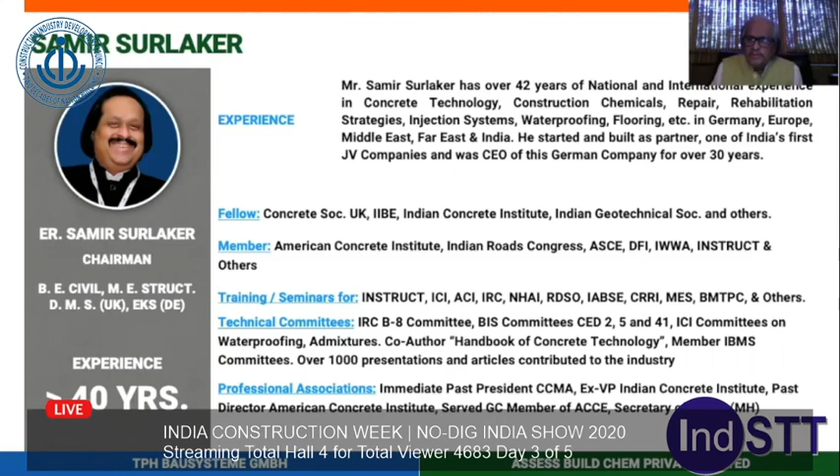Basically, I am a civil and structural engineer by profession. I have spent about 40 years in this line of construction chemicals in India, Europe, and at other places, and this is my line of specialization. I feel construction chemicals is a good field in which many new engineers can include themselves and even become entrepreneurs because the entry barriers are very low.

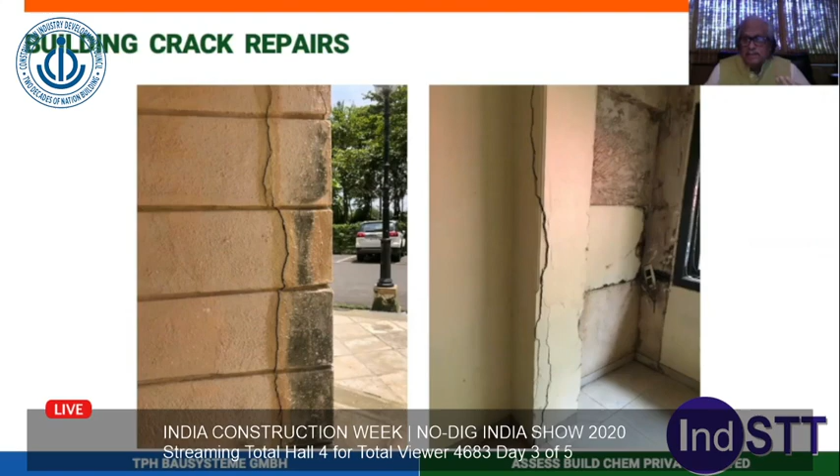As far as underground leakages are concerned, they are unstoppable during construction as well as after construction. We are talking about the concrete. In concrete, we'll always find cracks and capillaries. These cracks are the avenues for carrying the corrosion causing constituents to concrete, so they have to be sealed from the point of structural as well as durability.

These are the photos after repairs. Though we conduct repairs to enhance the durability, still in reality, the mortars that we are using are not shrinkage free. So they create these lines once again, which are the avenues for entry of corrosion ingredients, and while repairing, they will not stop the process of corrosion.

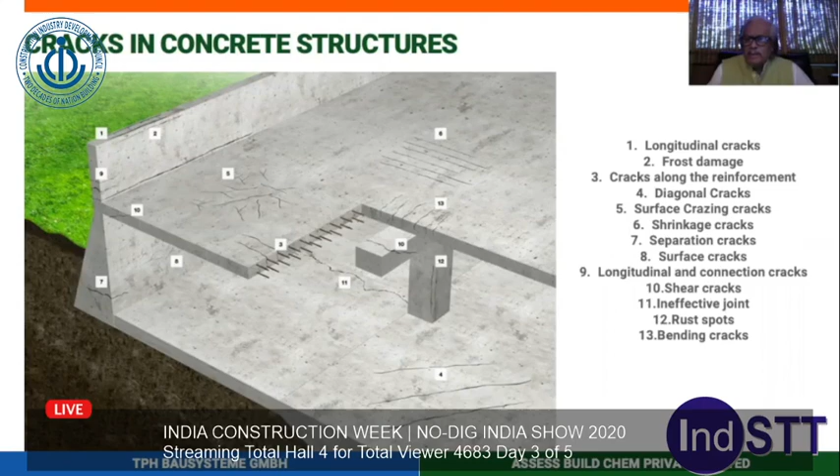There are cavities in concrete, which is also important to be filled. It's a different type of cracks in concrete, as you are aware. There are longitudinal cracks, cracks by different damages by mechanical means, and surface cracks. At the end of the day, we have to take care of all these cracks.

Also, I would like to say that it is not adequate to stop the cracks and put the injection material inside the concrete alone, because the source of water is behind the concrete, and that is the soil concrete interaction. We have to also take steps to stop that leakage, or to stop that source of water to a reasonable extent, so that we can keep that source of water far away from the concrete.

Injection technology gives you a chance to go behind the structures, into the soils, and put a stoppage to the water permanently as well as temporarily during the construction and permanently during the life of the structures. Third important point is the joints.

Joints are provided by design, as well as joints are there by virtue of construction problems. These joints become avenues from where water can leak. However we have taken all the precautions, it bypasses the systems, and these joints are open, and water also comes from the joints. So the injection technology also provides for resealing of these joints.

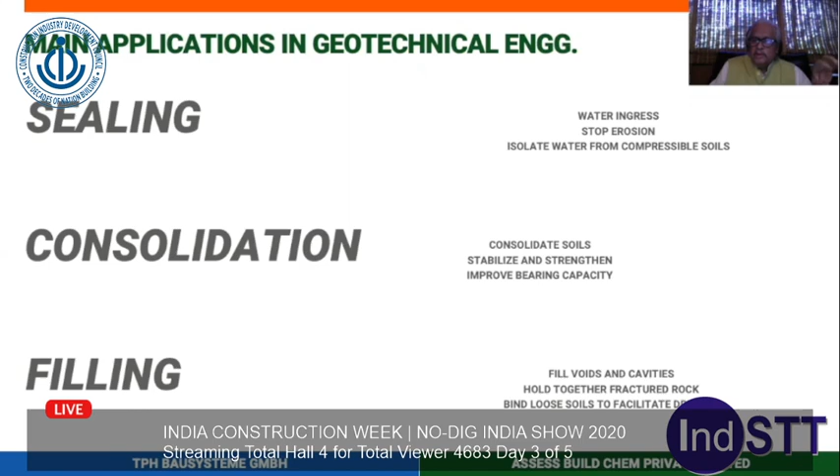The main applications in the geotechnical engineering of the injections are in sealing, consolidation, and filling. So this technology comes handy during construction and after construction.

Fortunately, there is a code EN 1504 which fully covers this whole gamut of repairs and rehabilitation, and also covers the materials for injections.

Before 10 or 15 years, whenever someone said about injections, we always thought it is an epoxy injection. We used to use epoxy injections a lot at that time to structurally regain the strength of the concrete wherever there are structural cracks. But epoxy has its limitations when it comes into contact with water, so this limitation is also filled by several other materials available.

At the moment, whenever you start talking to people about injection, the first thing they say is, oh, you mean PU, you mean PU foams. Please note, PU and PU foams is just the beginning of injections. These are purely temporary methods to stop the water, to enable you to seal the crack permanently. So this is not the end of it.

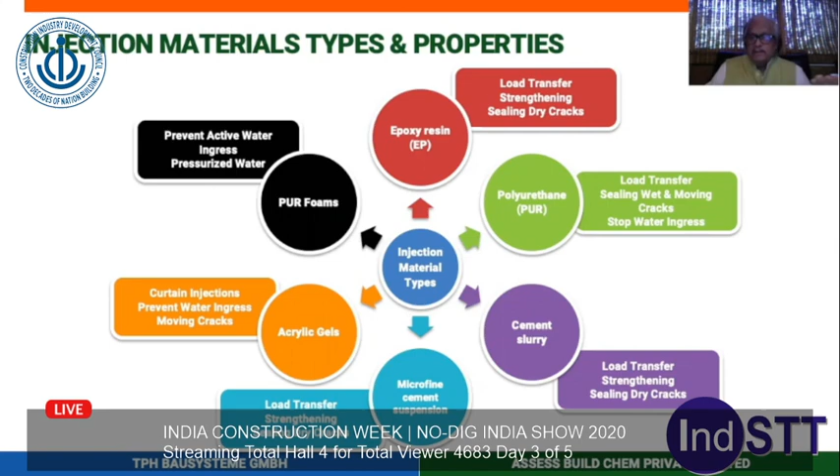There are different materials available, and these are to be classified. A good geologist and a good civil engineer, with the help of existing codes of practice, has to make a decision whether in cracks you require a ductile filling, or you require force transmitting.

Force transmitting means where there are structural cracks, where you used to use only epoxies. Due to the limitations of epoxies in conditions where there is water in the concrete, today there are structural polyurethanes which can be injected, which are more flexible compared to epoxies. This can also be used for repairing the girders of bridges where there is vibrational load.

And finally, for the swelling or just for the filling, you can also use foamed materials, which are either gels, silicate foams, or polyurethane foams.

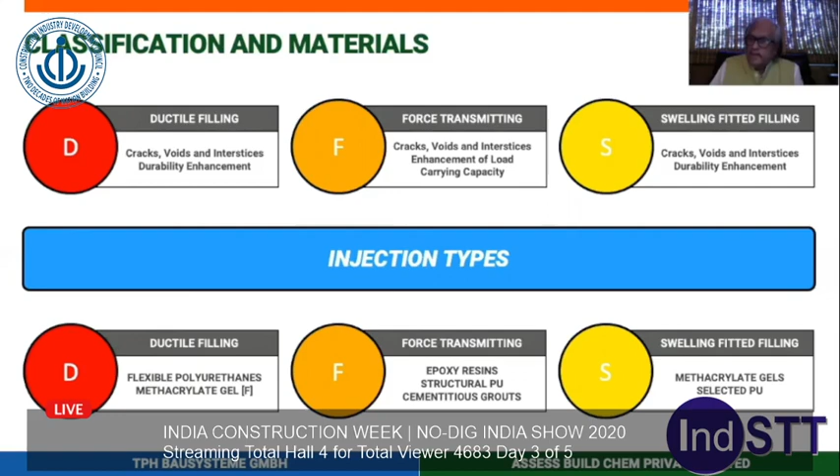So a large gamut of materials are available, but these are to be selected depending upon very few important things, which is the crack width, because crack width will determine the viscosity. Crack depth will also determine the viscosity, how deep you want the material to penetrate.

It will totally depend upon whether the crack is dry, damp, or whether water is coming out of it. If water is coming out of the crack, you have to stop that incoming water by putting pressure with your machines, to push back that water and let the injection resin reach the place where it is designed to reach.

The crack movements, whether the cracks are moving or not moving. What is our target solution? Are we doing the injections for structural stability, for load transfer, or only for preserving the durability, for sealing? The applicability, the locations, the applications, whether we can take big machineries inside the project - there are several different parameters connected to this.

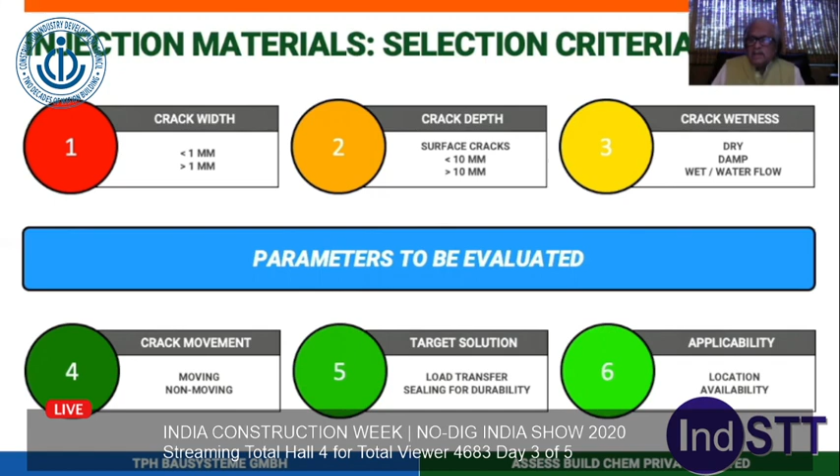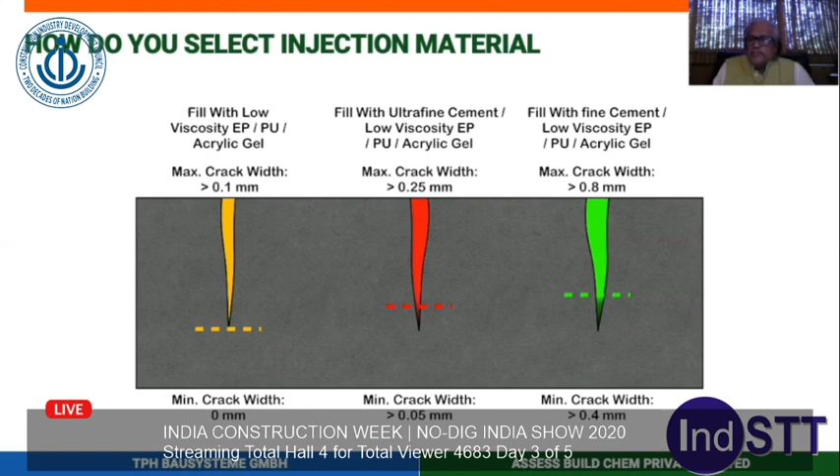So this is a technology by itself. This is not only a technology of materials, it is also a technology which involves the machineries. Only by combination of good materials, good application technology, and trained applicators, can one do successful injections.

This is just to give you an idea. Viscosity, as I said, is very important. Water is having a viscosity of 1, and water can penetrate - water is what has already penetrated. So we have to have materials very close to water penetration so that we can counteract with the effect.

If we take gels, they are very close to water. They can penetrate and their viscosity is less than 10 mPa·s. When you talk about epoxy resins, you are having a very wide range - so every epoxy resin is not for injection. From 17 to 100,000, this is very important.

Silicate resins are also excellent, from 90 to 330. So viscosity plays a very important role. The urethane resins, the polyurethane resins, have much lower viscosities in some cases so that you can really inject them inside deep cracks. You can use it as a filling, cavity filling injections.

Just to give you an idea, honey is 10,000. Normally you cannot inject a material when it crosses 500 or reaches 700 viscosity. The other thing which is important, what offers resistance to it, is mostly the concrete.

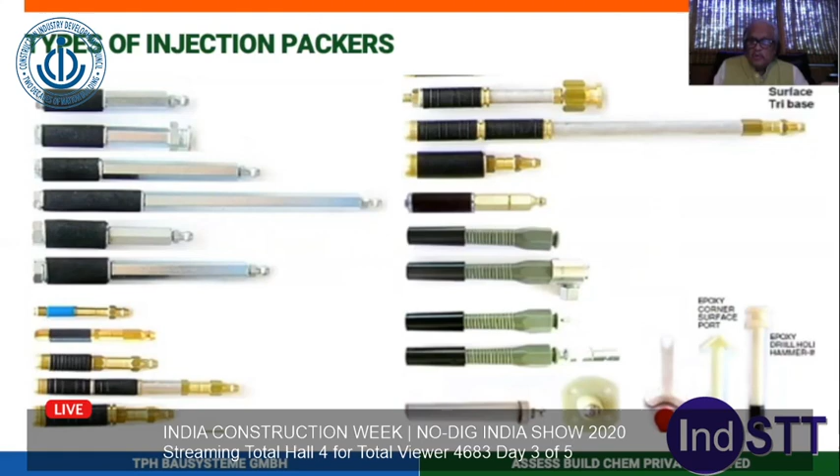What is most important about the connection is that the pressure you put through machineries is not lost due to bad connections. You also require sophisticated machineries which are properly designed.

For example, when you have a very small pot life injection which has to react within say a minute or less, even a few seconds like 10 seconds, then you need 2-component machineries. You cannot put both materials in one component machinery, so you necessarily require two component machineries.

Now these 2-component machineries - when you use polyurethanes, they are sensitive to moisture. So these machineries should be designed so that no moisture is penetrating. Polyurethane is not just the foams alone.

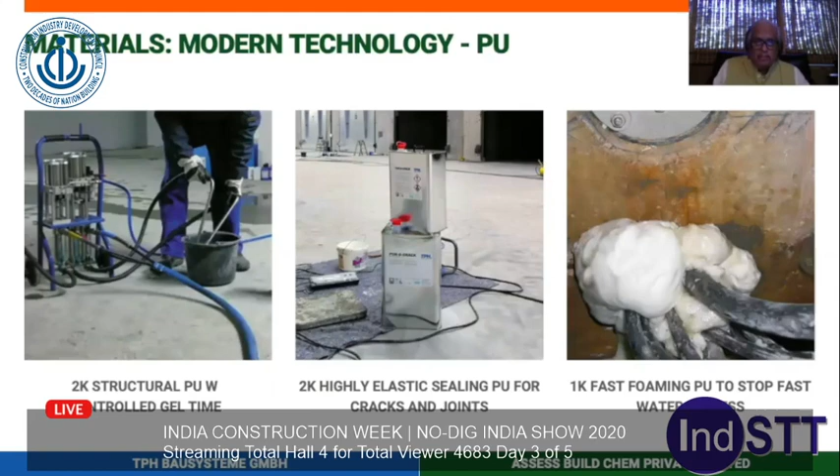Polyurethane foam is the basic thing, like 1-component foams which are used for very low pressure injection. So this is how it forms - the moment the material comes into contact with water, if you put a 1-component foam, it starts foaming.

This can foam - now this is a very important thing I'm saying. This can foam from 5% or from 3% up to 75%. So when you are purchasing the foams, it is very important to know what is its expandability.

The unit price is not per kilo price or per liter price of the foaming material, but it is the cavity that you are going to fill. It is also important whether the foam is hydrophilic, hydrophobic, whether it has open cells or closed cells, whether it is homogeneous, and in how much time it starts foaming. This will all depend on the type of project that you have.

So this is a basic foam, which is a 1-component foam. 1-component foam is suitable only for temporary stopping of material where the heads are not high, because its reactivity with water cannot be controlled. If the water is cold, it doesn't expand. You cannot control its setting times, and it has limited applications.

In structures like tunnels, the water will be gushing. With this type of water gushing, which is more than 6 bars, if you start injecting this with cement or cementitious materials or even one component foams, the pressure of the water coming is 6 bars pressure. You will not be able to stop it with one component foam, even temporarily. Let us not talk about permanent stopping, but even temporarily.

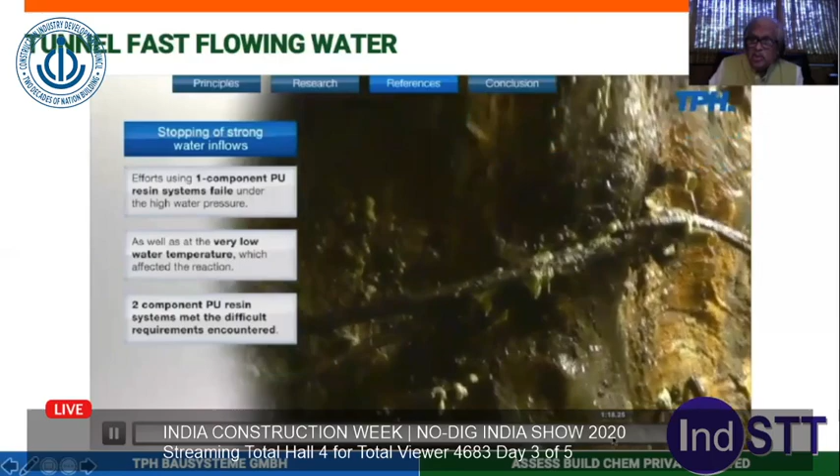So primarily, you will have to go in for two component injections, because two component injections have controlled reactions. They are a little bit harder compared to one component. The foaming capacity is less, maybe up to 14 or 15. So they can really stop this water when you use proper machinery to push these materials inside. This is how from one component material you move to a two component material.

Then there are flexible materials, ductile filling materials. When you are talking about pushing these materials into cracks, in concrete, in podiums, and in other structures where flexibility is required, polyurethanes are very, very flexible. You can inject them, and they are not sensitive to moisture.

In cases like this, which you normally see in basements, underground, and parkings, you can see the water coming inside. This is the method of injection. You have to drill the holes at a 45 degree angle, put mechanical packers inside, and fix those packers so that the material reaches the center of the crack. Then start injecting the material with proper machinery and proper connections.

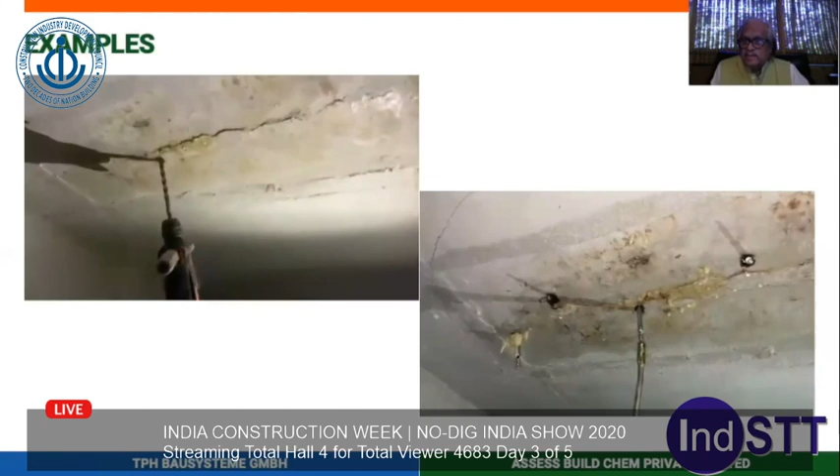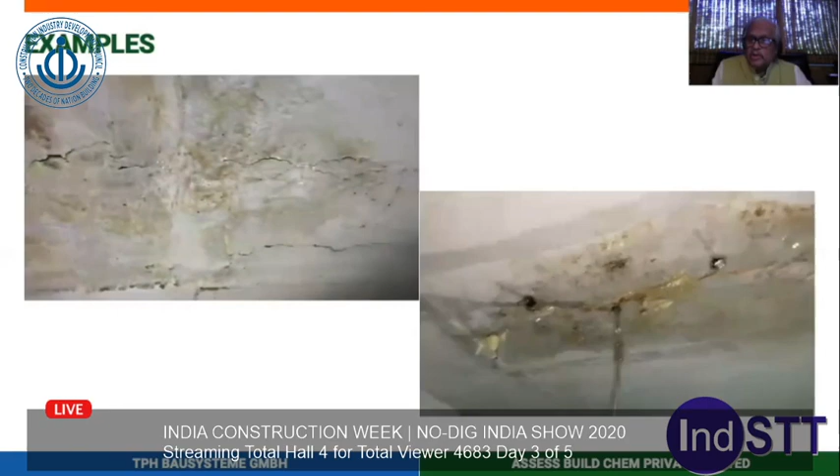Here you can use the ductile filling material. These are two component polyurethanes, but they have limited structural capacity. Their aim is to seal these cracks, not to increase the strength of the concrete - this is not a force transmitting injection. But these are also important for injections in podiums and parking places.

And then comes the most important - two component structural polyurethanes. Structural polyurethanes develop a strength of 70 to 80 Newton per mm square. So you can replace epoxy injections with them, even in cases of dry cracks, so that you don't have to mix too many materials. They can be used underwater. There is no problem of hardening, and they are not sensitive to moisture.

Their foaming can be controlled from 1 to 15. They have very high bond strength, very high shear strength, and this is very important for either soil consolidation or force transmitting cracks. And these are the materials. So polyurethanes alone, foaming polyurethanes, is not the end of the story - it is just the beginning of the story.

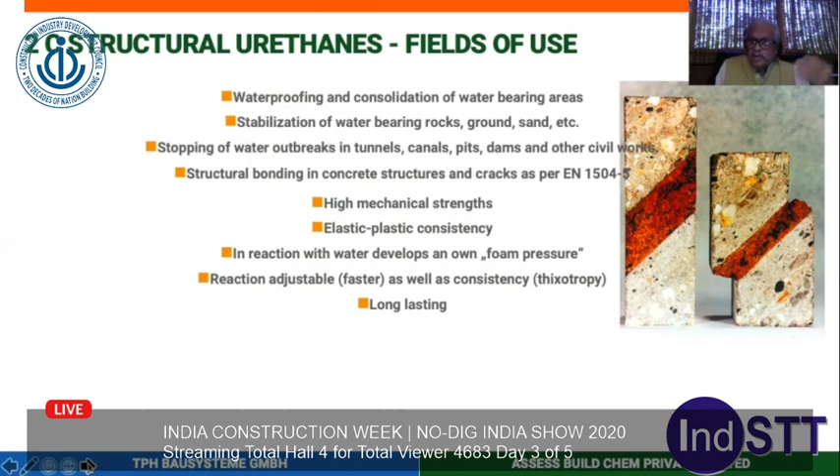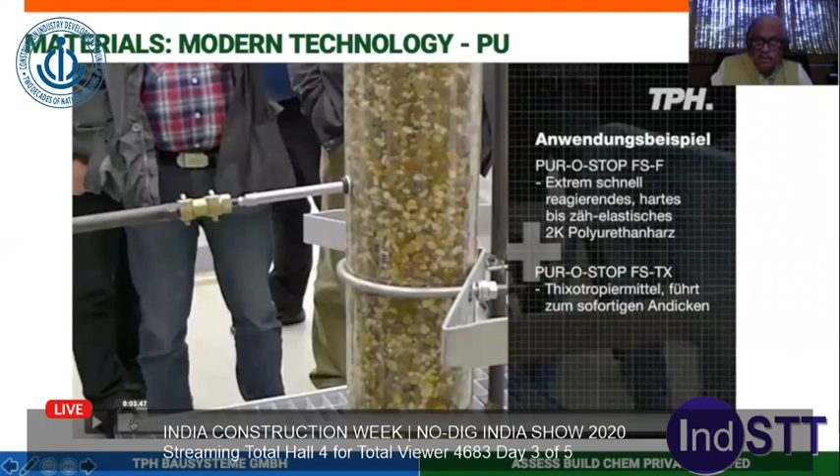So even if you do the temporary stoppage of water by one component foams, for permanent stoppage of water you will have to go for two component structural injections. This is just demonstrating how it works, because this structural injection can be used in existing structures, as well as coming handy when you are building things like tunnels.

In tunnels, where your geological examination has already shown that maybe 70 meters ahead you already have a fractured rock from where water is coming, you cannot stop your TBMs from going. So this comes very handy.

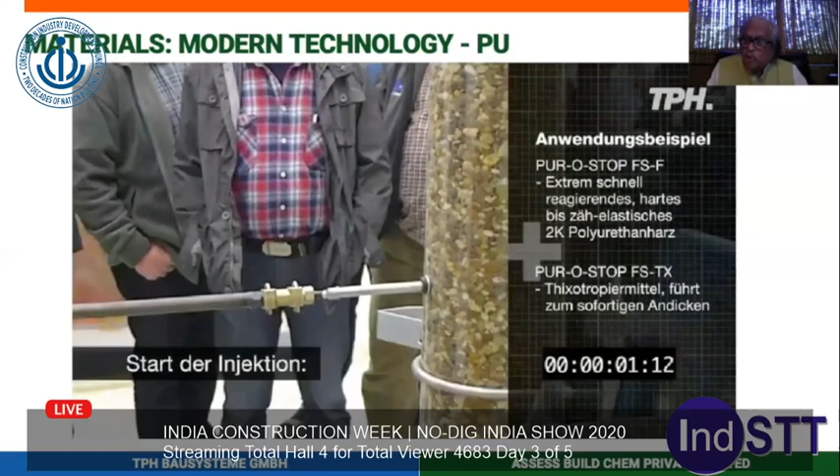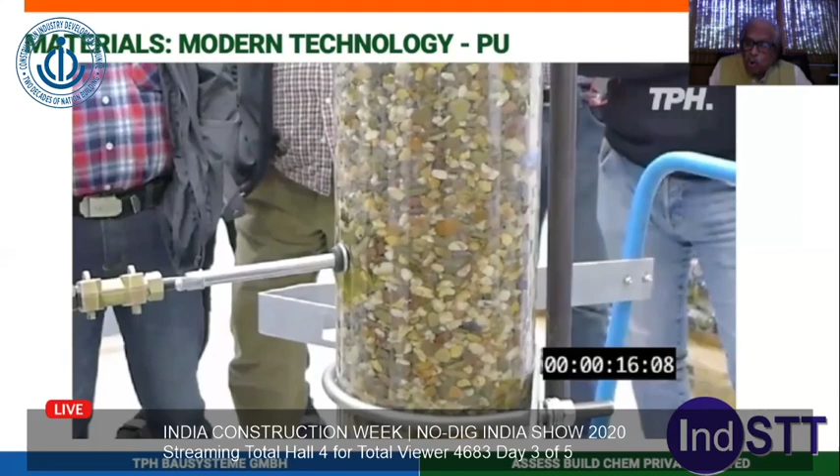So you start injecting a structural polyurethane. It's only 7 seconds - first, the speed of reaction is very important. In 7 seconds, in fractured rock, you're putting the material in. In about 17 to 20, or 20 to 30 seconds, that much time is required so that the material can spread all around, because you cannot just make it set within 1 or 2 seconds - the material has to also spread all around.

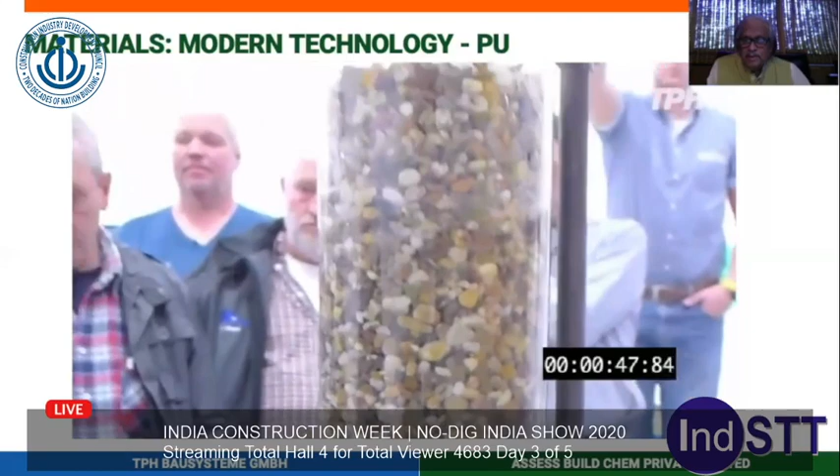Then it has got a foaming capacity. When it comes into contact with water, its reaction starts within about 30 to 40 seconds. The reaction has slowly started, and it is a structural, permanent solution.

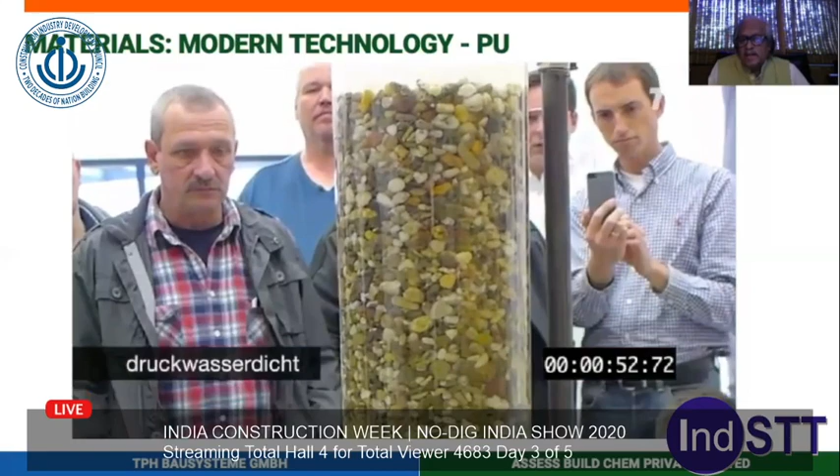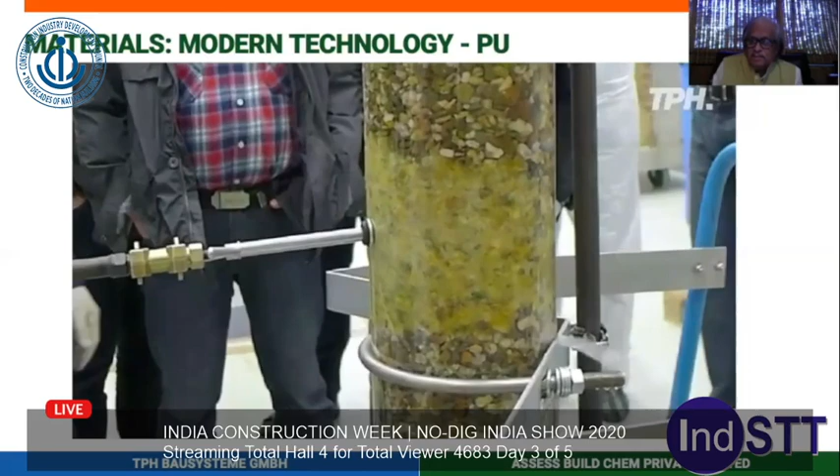If you see now, the water has stopped going inside and the water is rising. From the bottom, the stream of water is getting reduced. It has expanded, not very much, but to a reasonable extent so it is spread all around. The water from the top is flowing out. The water which is coming out with gushes is now slowly stopping, and within about 1 minute, the total process is over.

This can similarly be used in our basements. We have a lot of problems in our basements. The water comes inside and you cannot stop it with foam. If you stop it with foam, tomorrow, once again, the foam is thrown out because the foam is not durable.

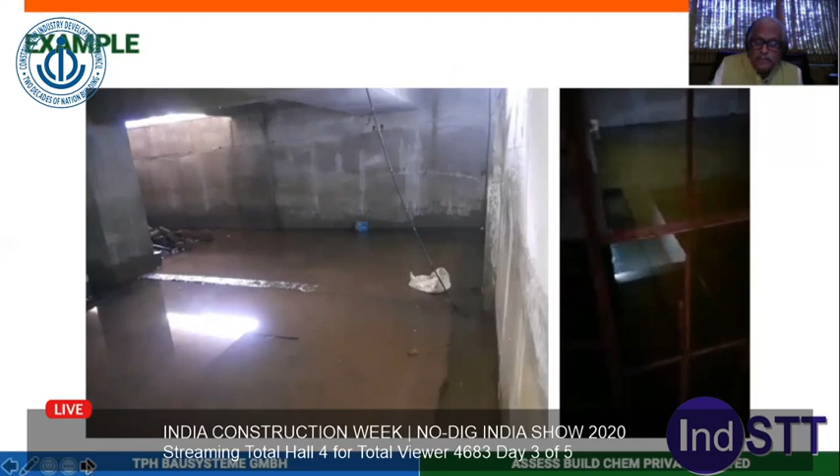These materials are tested for durability of 100 years. There are long-term field tests of about 20 years, and by extrapolating, these materials are very suitable and remain almost permanently, which is very important. Foam is not stable, foam does not have the capacity to bond to concrete, and foam does not have the water pressure bearing capacity. So these different polyurethanes are very handy when you try to stop water during construction.

For example, this is the type of water. You can try to put any foam inside which expands 50 times or 40 times, but it cannot stop the water. Because to stop this type of water coming under a pressure of 6 bars or 10 bars, you really need polyurethanes which are structural, which can harden totally underwater within a period of 1 to 2 minutes.

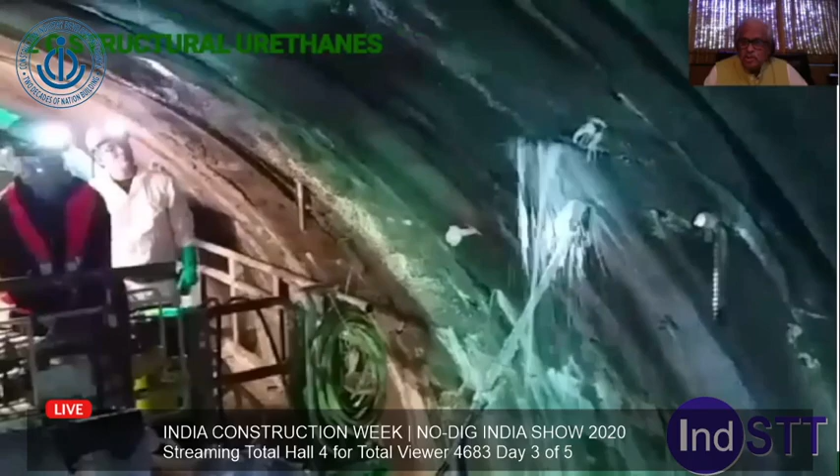So your construction can go on unabated, and it forms a permanent seal—a permanent solution. You see the water is going on reducing in a matter of just minutes. So this is the real live stopping of water. Within about 1 or 2 minutes, the flow of water is reduced, and these are the only means of providing a permanent solution during construction as well as after construction.

Still more versatile resins are the two-component silicate resins. Polyurethane is not the end of the story—there are also silicate resins, these organo-mineral silicate resins. There are foaming silicate resins and non-foaming silicate resins. Silicate resins bond very well under wet conditions.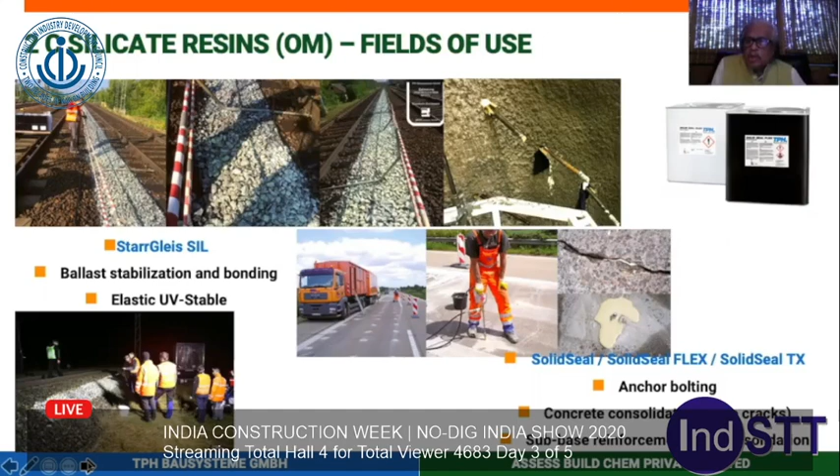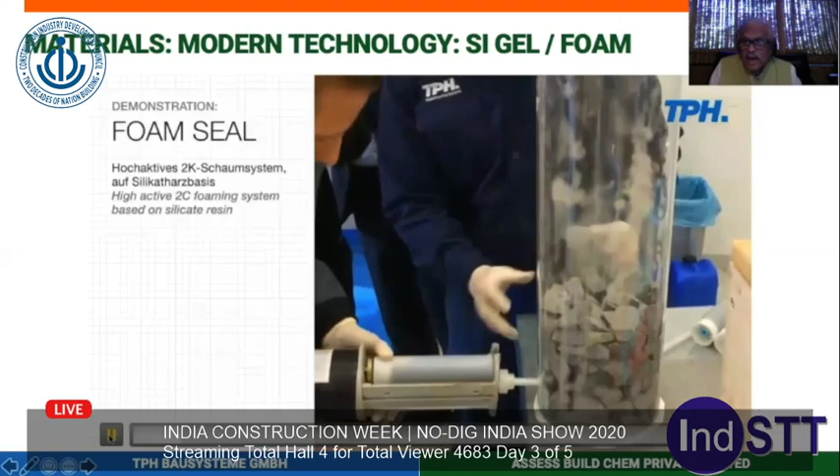Silicate resins also foam structurally, say at a ratio of 1:3, and they can be used for the lifting of structures. They go very nicely inside the soil and do the stabilization. They are structural and can also be used for the same purpose as polyurethane injections. If there is a fractured rock with no water, or a fractured rock with water where you need polyurethanes—because polyurethanes form only in the presence of water—whereas silicates form on their own and can glue. They can glue this fractured rock, especially during construction.

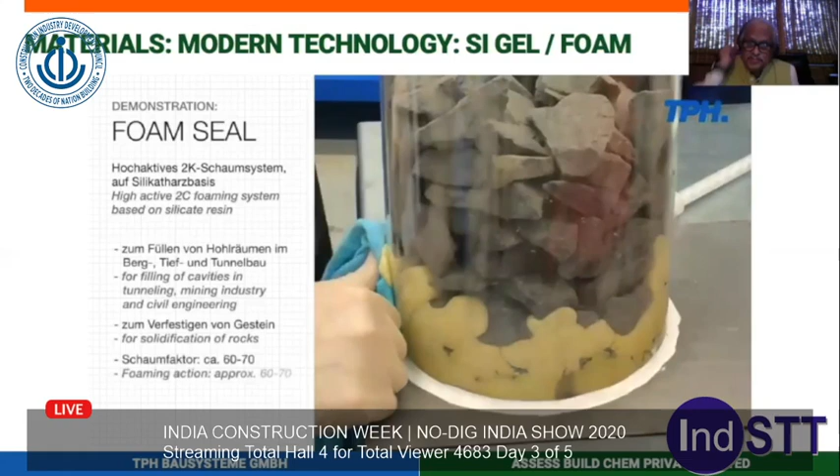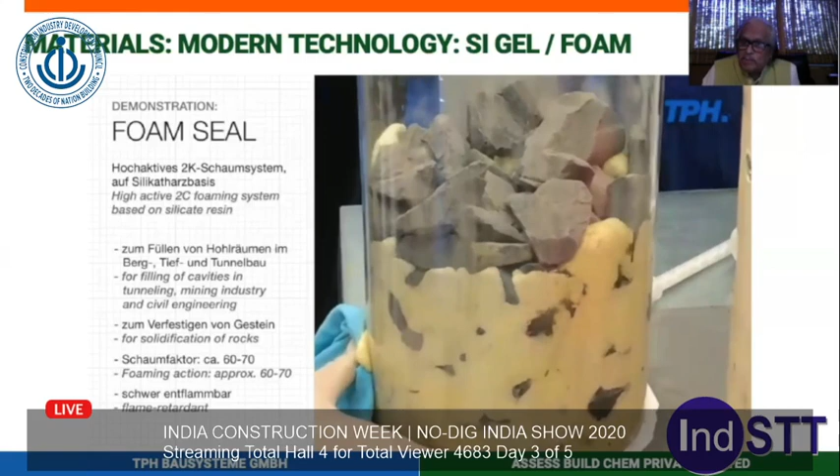You see here, this is now already injected. This foam with restrained expansion also develops sufficient structural strength, so when the machine passes through, it offers enough resistance. You can see the very fast foaming.

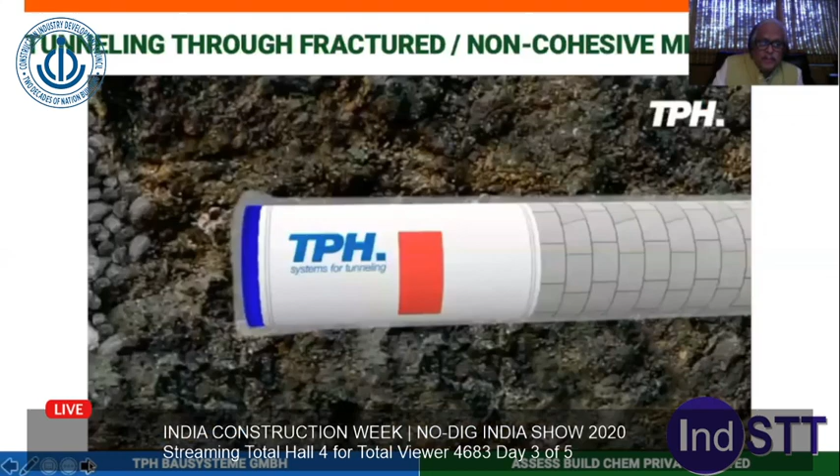Even if there are some remnants of water, it will throw it away. These are mostly used on TBM machines, and this would be a good example to show a tunnel boring machine. When the tunnel boring machine is moving around, geotechnical surveys have already identified that at X meters you are having an issue, so you are already putting in the silicate foam—it cannot move, the shield cannot move.

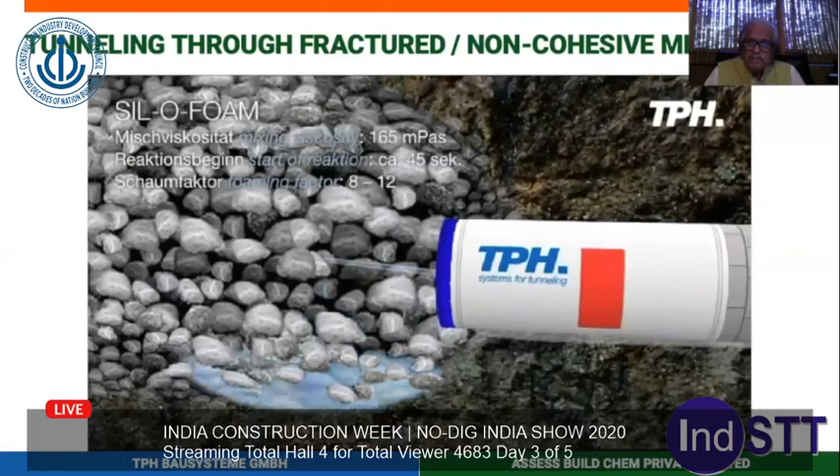So the silicate foam is injected. This foam is not expanding 60 or 70 times—within 45 seconds, they have maintained the foaming factor at 8 to 12.

One thing you have to remember: you'll see some certificates that claim a foaming ratio of 1 to 15 with a compressive strength of 15 Newton. This is not possible, because the tests for foaming factor are done with only a 1:1 or 1:3 ratio. So you can't have both things—as the foaming increases, the compressive strength decreases.

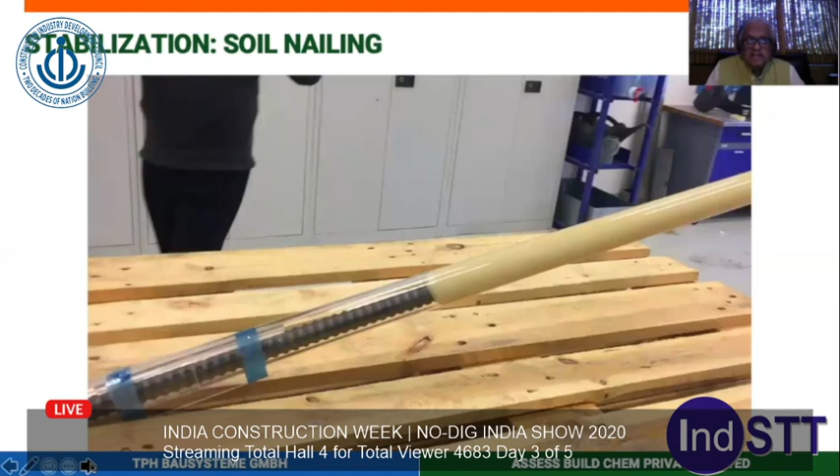Now these foams are also excellent for soil nailing. Inside, you have soil nailing, say about 15 or 20 meters, with self-drilling anchors. It's a very versatile material. It doesn't expand—in this particular case, it is non-expanding.

It will slightly expand so that it creates a bond. If there is water inside the structure, you cannot use epoxies for fixing your anchor bars, whether it is self-drilling anchors for soil stabilization, or even transfer of loads in RCC repairs to be done to foundations below the water. There you have to go in for silicate technology.

You shall be seeing now how many materials and how many parameters a geotechnical engineer has to consider before just writing specifications, which I see in many dam specifications. He said repairs are to be done by 2-component polyurethanes. This does not say anything. The performance criteria should be given.

What strength you require for repairs, what viscosity is required, in how much time. For example, this develops a pull-out load up to 20 tons within about 10 minutes. Within about 10 minutes your reaction is over, it is developing the full strength. These are the resins you have to consider as new generation resins.

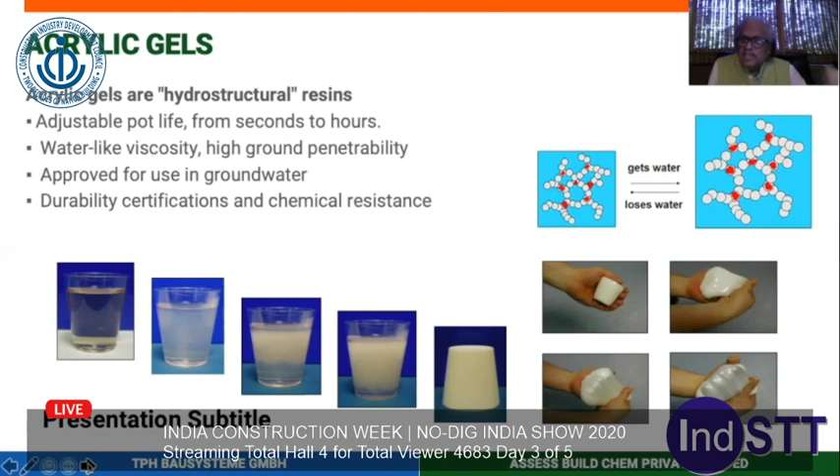Please note, every gel is not a gel. Some gels, they will just become gels, but after some time they will shrink. Once they shrink, the joint becomes very vulnerable to water entry. So they react very fast.

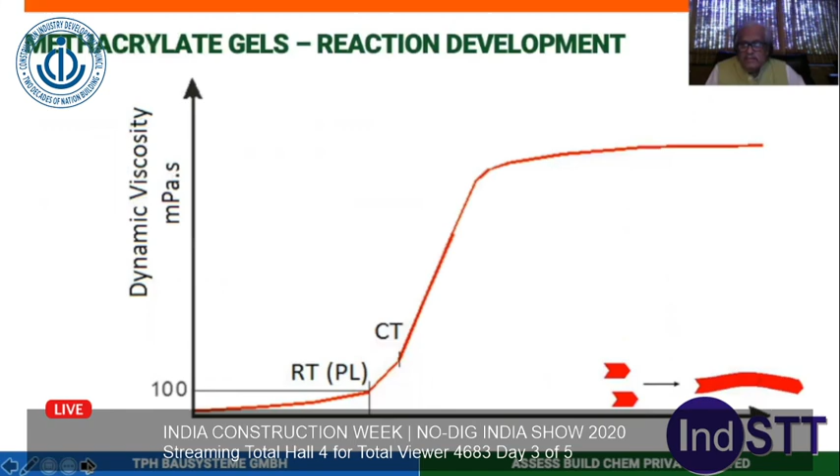You can see within, when it reaches say a viscosity of 100 mPa.s, it is still pumpable. Then the reaction time, in about 10 to 12 seconds, you can control it. Then it starts increasing in the gelation time, and it is gelled. Within about 20 minutes, it is a proper gel. I will show you one or two videos to show you the type of gels.

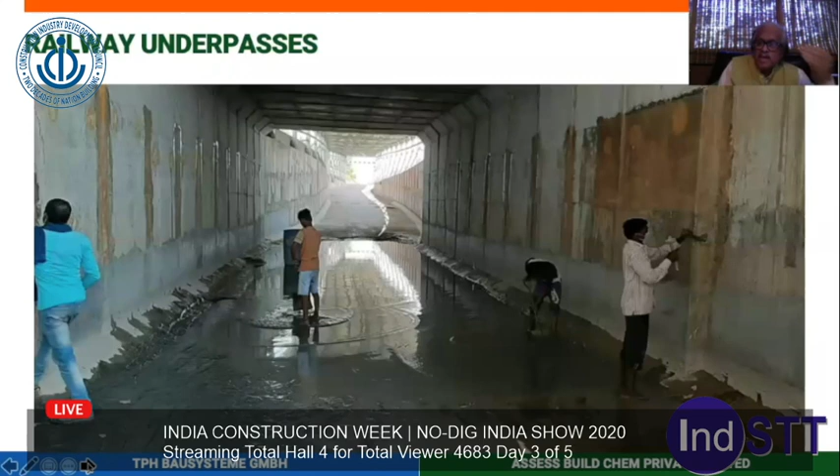These gels are normal, and can also be fortified with acrylics to give a characteristic so flexible that you can convert it into a joint filling material. There are so many projects coming to us of this type, like railway underpasses. These underpasses are normally made out of precast elements having a depth of about 4 meters, a length of about 4 meters, and a depth of about 60 centimeters. They are placed side by side.

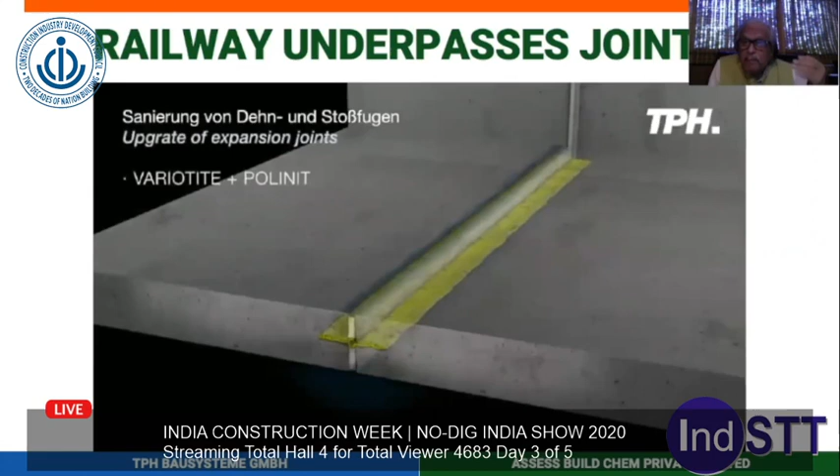Sometimes the joints are filled by some boards, sometimes with other materials, but they fail and water starts coming inside the roads. The roads become unusable, and the gels are the only solution. Please note my words - I'm saying the only permanent solution. Initially you can put some foam inside to stop the water if it is coming in very big quantities.

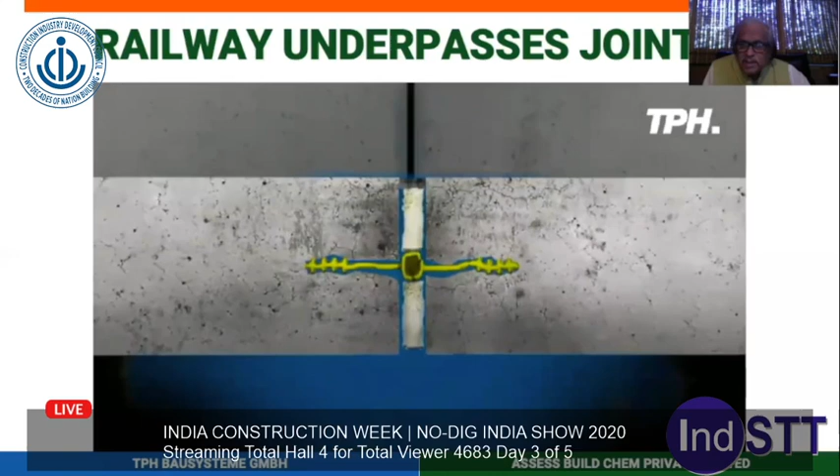But if you see these joints, sometimes water stops are provided in the two connecting elements. Sometimes we put styropor inside, sometimes you pull Styrodur or dimple boards inside. But by some chance these are breached, the water still passes, and the joints become very vulnerable.

There are suggestions from people saying you use only foam, no problem, it is stopped. Of course it will be stopped for 2 months or 4 months or 6 months, because foam is not a permanent material. Some people say put other polyurethanes inside, rigid or flexible. No, this won't help either, because you have to create a joint sealing material.

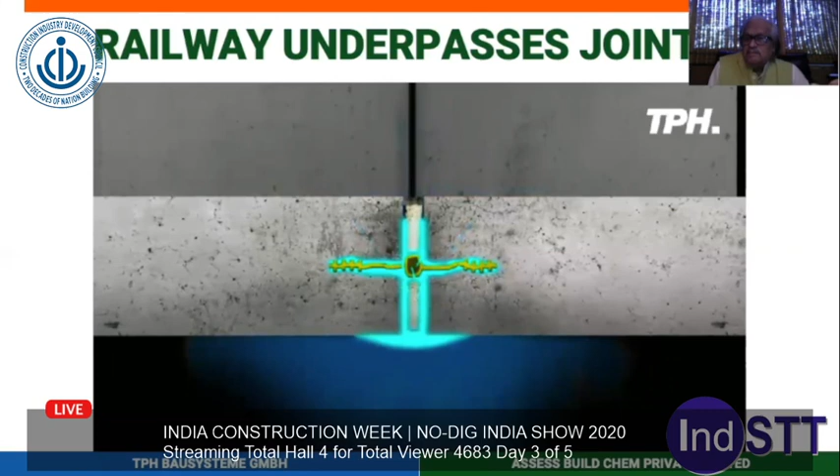A joint sealing material should have adequate bonding on the sides. It should have enough elasticity for expansion and contraction, and it should become a seal - joint sealing and joints, because this is very, very important. So any other method won't work.

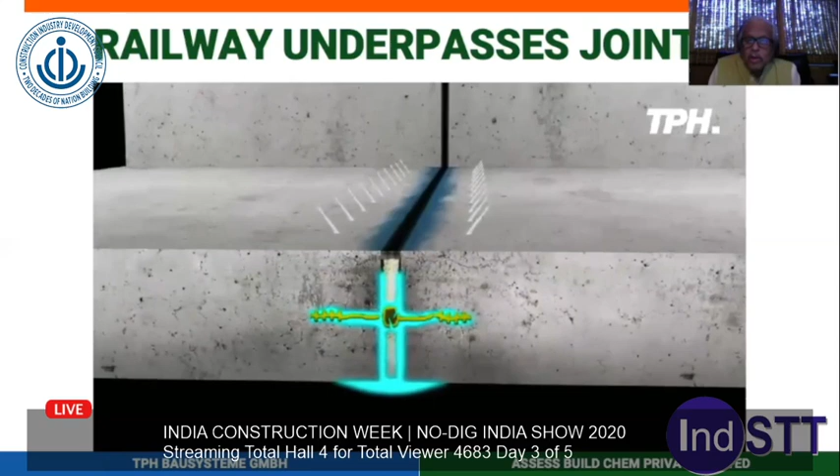Over a period of time, when you use the gels, you inject - you can see it is such a simple process, a single step process. You could make this simple one-step process into a 4-step or 5-step process by putting other injections or foams inside. Okay, you can still put some foam inside to stop the water initially, but permanently what is important is a gel.

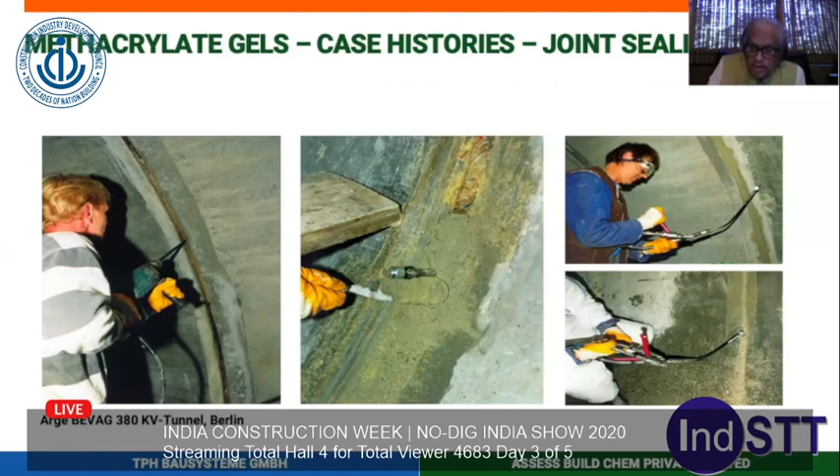Which will set inside. This material is also very, very important in precast joints. In precast joints of the segments, you already have gaskets put inside. However, due to constructional problems, these gaskets are not 100% waterproof, and water starts coming in through the gaskets. But please remember, at the end of the day they are joints - you can inject through the joints by needle injections.

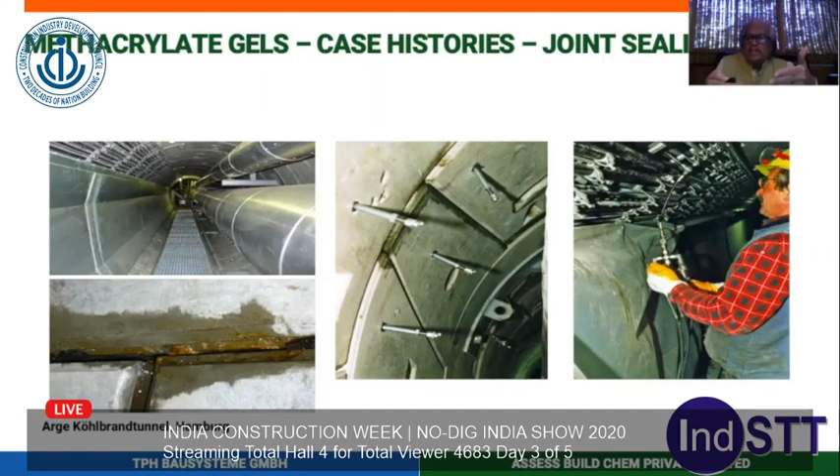Also, you can inject it from two different sides. You don't have to puncture. Sometimes you can directly puncture the gaskets and go behind it if water entry is less. If water entry is more, you can do it through the packers, which are put at 45 degrees. They go behind your gaskets and create the same thing. The same technique—you are going behind that physical barrier.

Some physical barrier should be put. If they have not put a physical barrier, and if your width is 60 centimeters, you can put some Styrodur board up to say 30 centimeters. So automatically you get a physical barrier. Go behind that 30 centimeters at a 45 degree angle and inject a gel inside it. A little bit of gel will come because there is not a sealing with the thermocol, Styrodur board, or dimple boards—some material will go there. It is good for you.

If you want something more sophisticated, if this comes in the factory floorings, you also have a small portion kept above where you can fill a joint filler. You can seal that joint with polyurethane joint sealants or polysulfide joint sealants—many joint sealants or polymer joint sealants can be used. But this is the basic technique. There's no other technique, and this cannot be a temporary thing.

I wanted to show you, for your interest, the material—what material is going inside. It is not a rigid material like polyurethane, which I showed you, goes inside. This is just to show you the material that goes as a gel. This is a fortified gel, just a trial to show you. You see, this is the material, two components. We are simply pouring it to show you the type of material.

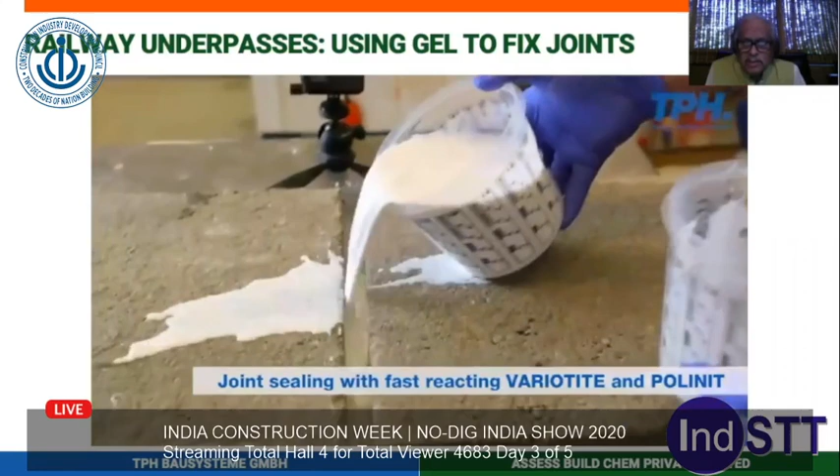It gels within no time. Finished—the material has already started gelling. It has already gelled. It is a 3-component gel: A component, B component, an accelerator, and a fortified polymer.

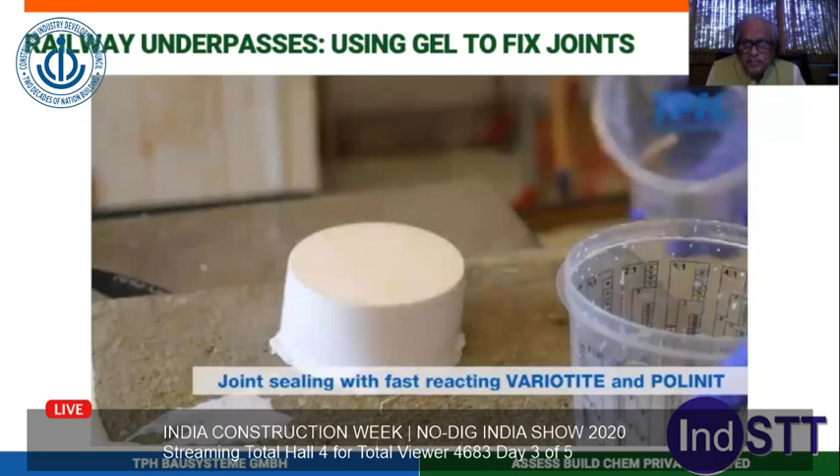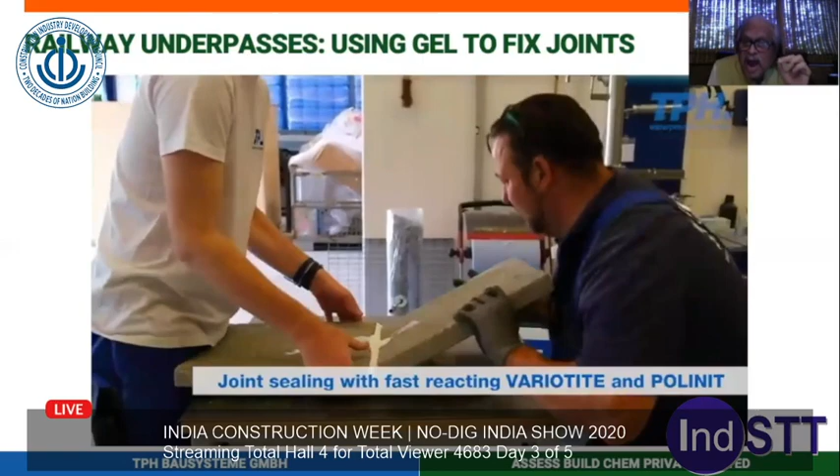You can see here, within seconds—within 10 to 15 seconds. And this is the material that goes inside the joints. If you put any other rigid polyurethane inside, or a flexible polyurethane inside, within 10 minutes it has developed adequate bonding strength, which is most important. Any material you use to recreate the joints in the segments, or to recreate the joints for the underpasses, or any other joint from where water comes—a joint is a joint. It is to be treated like a joint. The bonding should be there on the sides, and it should have enough elasticity.

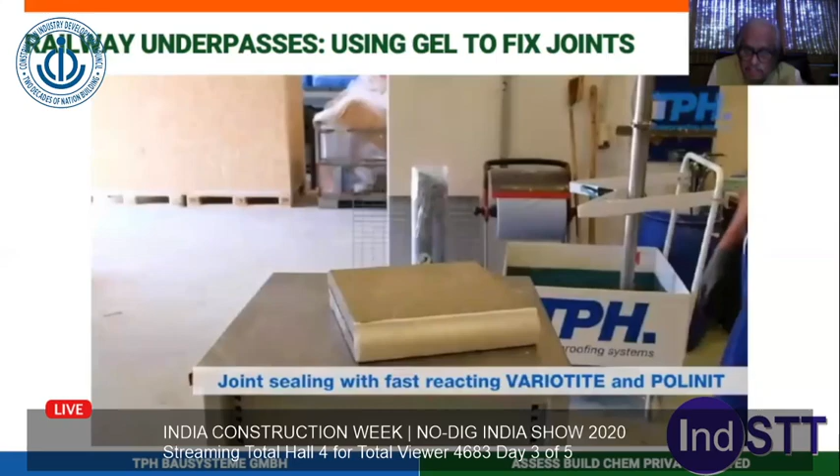You can see here, within 10 minutes, any water that comes reacts with it, and it is totally elastic. What is more important is that this material is tested with proper certifications, with proper certificates, for a period of 20 years in the field. There are official test certificates available for this, because of the durability.

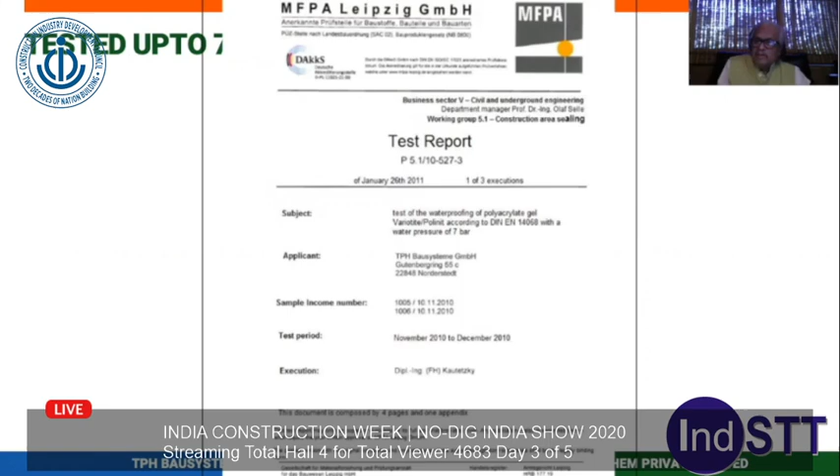Once you try to put something in a metro project, and the metro project is designed for 120 years, any material that you put behind should have that durability. Also, when these are tested, you can see it has been tested for 7 bars. That means if you take a one-component foam, even if the pressure is 2 bars, it will throw the foam out. If you take another 2-component foam, maybe at 4 bars, it throws out. These materials are essentially tested as per EN 14068 to 7 bars, but they remain live even up to 12 bars—that means 7 bars means 70 meters of head.

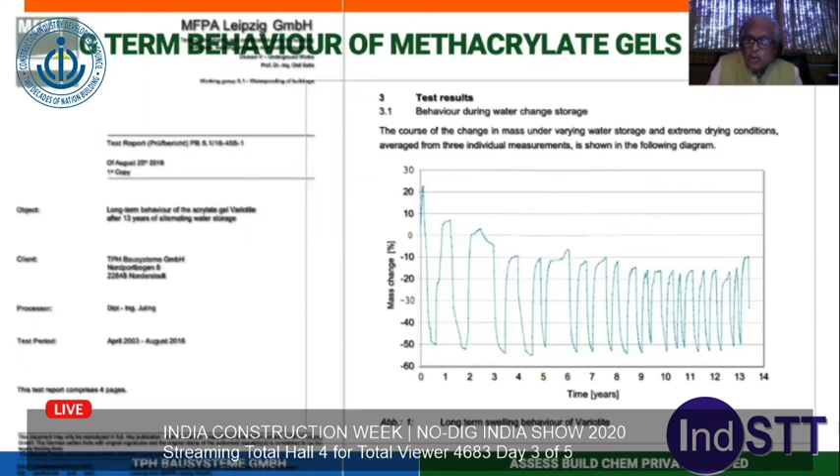For durability testing, these gels are liable to expand and contract inside when in contact with mud or with water. They can be tested—this has been tested up to 13 years in the field, showing how much it expands, because when there is less water it shrinks, and when there is more water it expands. If you see the cycles over a period of 13 years, this can be extrapolated, and the engineering estimation of durability of this gel is 120 years.

Compared to your PU foam—a PU foam doesn't bond to concrete. A PU foam cannot go inside the joint. It can't bond on the sides of the joint. A PU foam cannot be so flexible as what I said.

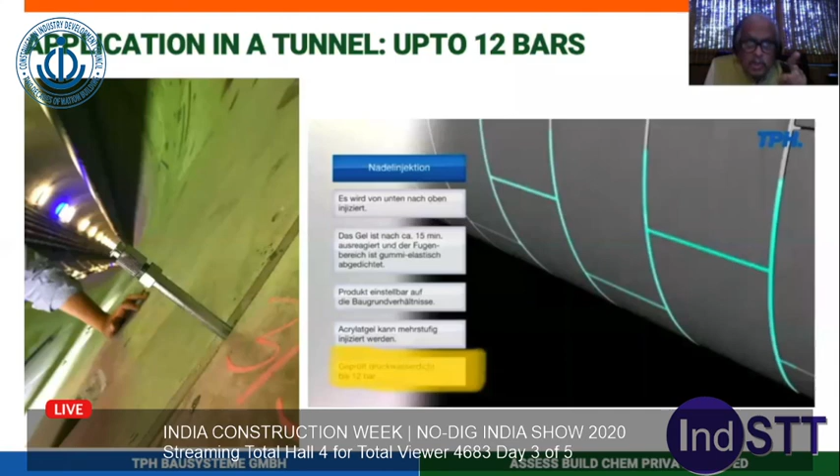PU foam cannot last for 120 years. So if you want a permanent solution, these are the permanent solutions available to you. And more than that, this has been tested for pressure and durability.

There's a no-dig show going on simultaneously, with micro tunneling. Even if there is a water pressure line with pressure of about 12 bars, and the joints are leaking because they're built segmentally, water can go inside, which is very dangerous, and drinking water can go outside.

There's only one way to stop it as of now: using acrylate gels. It is not one component polyurethane, not two component polyurethane, not one or two component flexible polyurethanes, not a two component structural polyurethane, because we need flexibility here. We need a good bond. It should remain under pressure, and we also need durability.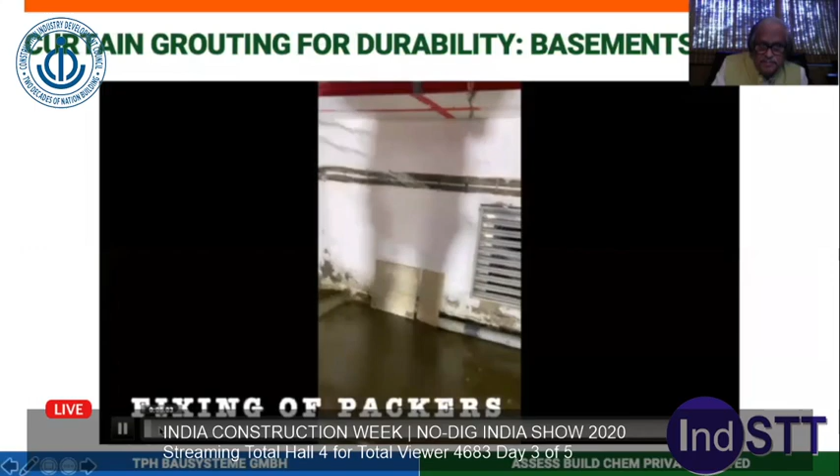So these are the solutions available now, on a simple example. If there's a basement, this is a basement done in Bombay. This is a 6-level basement in BKC, where the water was coming with this strength.

And we use the same technique. Since more water was coming in the beginning, we use the polyurethane foam, one component or two component, to stop more water coming inside. But that is a temporary solution. You need to use a foam, but a foam is a temporary solution, not a permanent one.

We used also some physical means. You put some rods inside, some lead inside, because the water has to be stopped for injection to work. Then we are injecting, with the knowledge of the structure, with expertise, with trained applicators.

This is 6 floors below, a 16 meter basement in Mumbai. And this can be stopped. The water can be stopped permanently. What is more important is a permanent stoppage of water, not temporary.

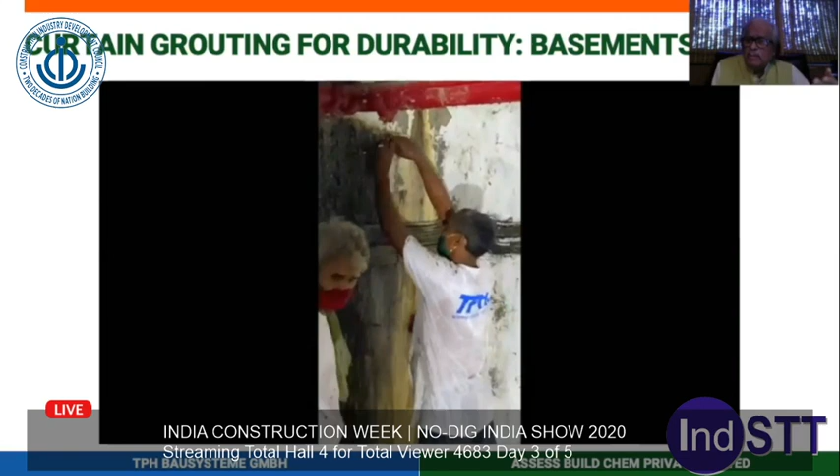They have done several trials for several years. So many people have come and injected so many things: cement, polyurethane, rigid polyurethane. So many things were done. But here, what we finally have to create is a sort of curtain walling behind the basement, which can withstand even 7 bars or 70 meters.

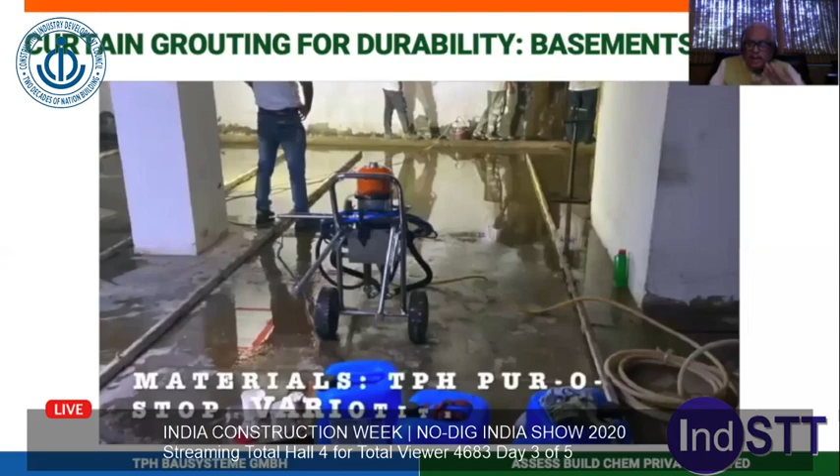So it forms a membrane. That was our trained applicator standing there with machinery, well trained. This machinery is from Italy, two component machinery. It is beginning for injection. You require expertise, you require expertise.

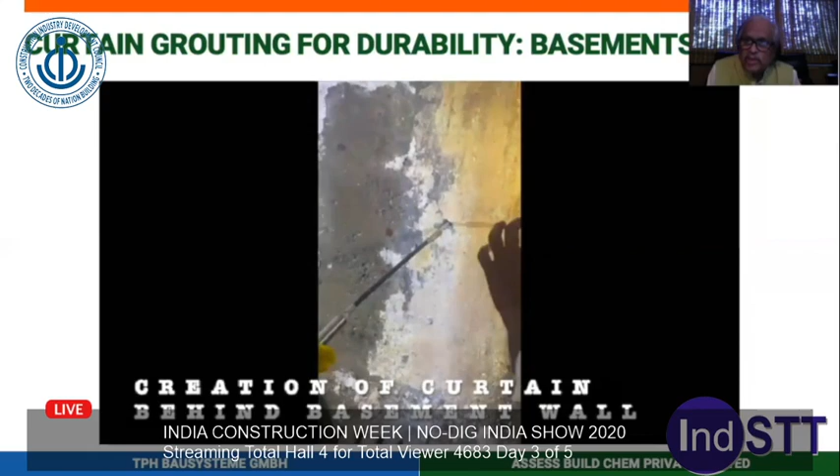We offer trainings. This is a beautiful opportunity for new engineers to go in for their internships, or become entrepreneurs. During this time, the jobs are less.

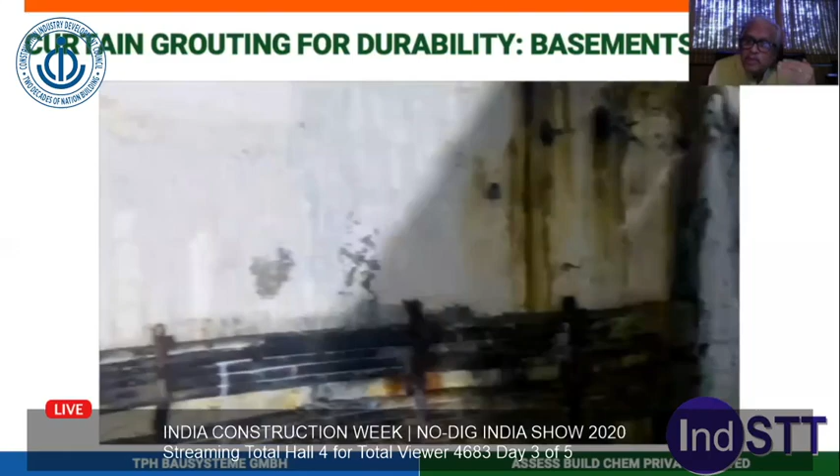We are injecting now behind the basement wall. We are not injecting in the concrete, we are injecting behind. So what we are doing is creating a positive waterproofing from a negative side. We are standing inside and creating a waterproofing layer outside. So our whole aim is not only stopping the cracks in the concrete from where the water is coming, but stopping the source of water. We are keeping that source of water away.

And as I already discussed, there's durability, a guaranteed durability. It is not poisonous for any water, and the water is completely stopped, and stopped permanently.

I request you, please use these technologies. Please use your engineering knowledge, your geotechnical knowledge, your civil engineering knowledge. Please use your common sense, civil engineering common sense, I would say.

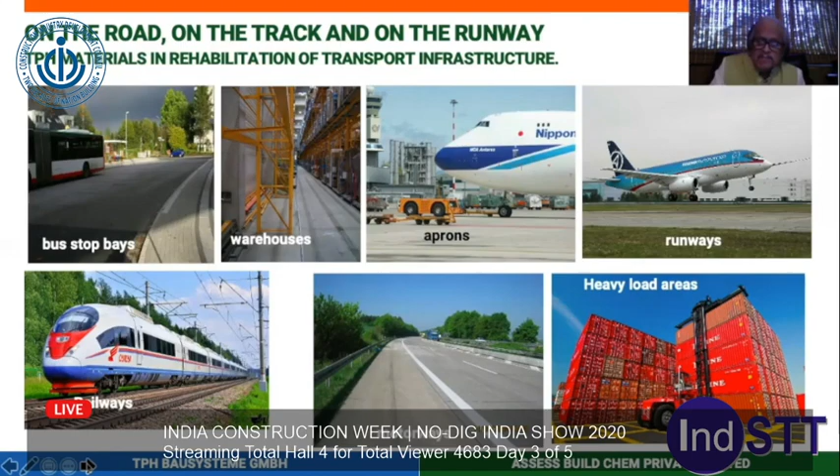And the final use of the injections is also to do repairs of infrastructure. You must be seeing at many places there is sinking of the slabs, like runway slabs or highways, they settle. Now when they settle, you have to really see which material can penetrate.

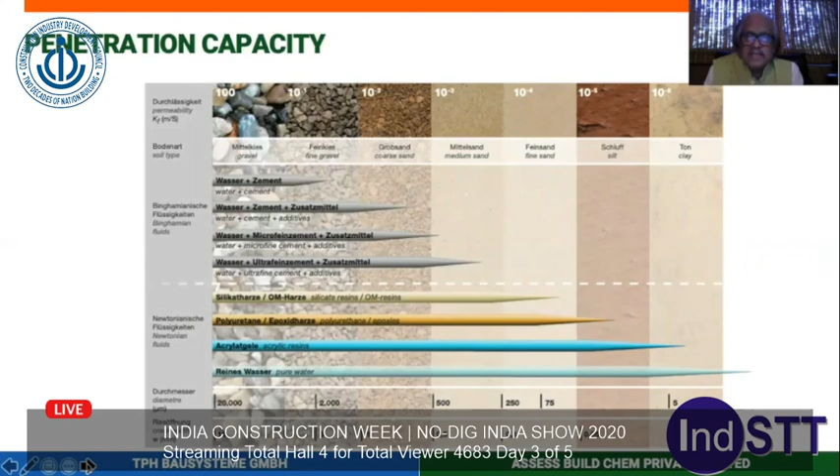So this is a guideline. You can see permeabilities ranging from 10 raised to 0 down to 10 raised to minus 6, depending on different types of soils, and the materials are put on one side. We can even go almost to half the clay penetration capacity. Which material is to be used? This is a small handout or guideline you can follow: which material can be used when water is there, and which material is to be used when there is no water.

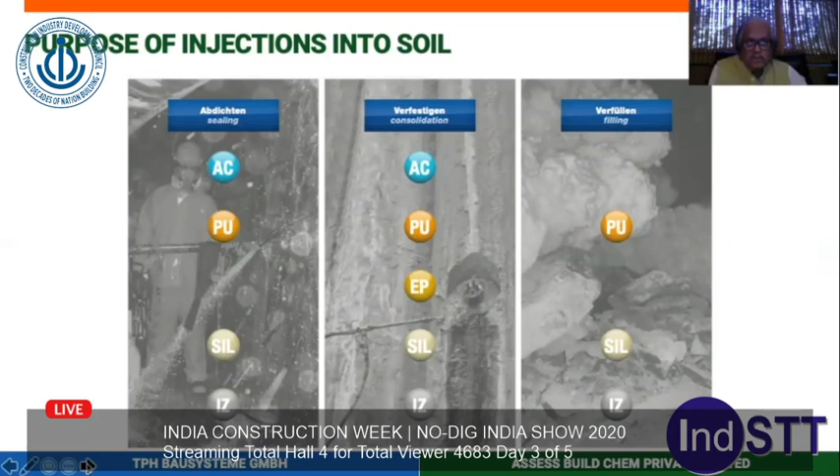There are materials which can set in water, which can set without water, and which can set either in water or outside water. This is for the purpose of injection in soil. The reason I'm telling you this is because when you are doing this, these are the strengths developed.

If you see a cement suspension, micro cement, that develops very, very little strength even after 24 hours. The strength developed is not even 10 newtons. After 28 days, because you are putting so much water into the cement suspension, it's only 15.

If you use a good concrete, after 2 hours it starts setting. But before that 2 hours, if the water pressure is high, it can be thrown out. But if we use silicate resins, within 1 hour or 2 hours, it can develop a strength of up to 50 newtons.

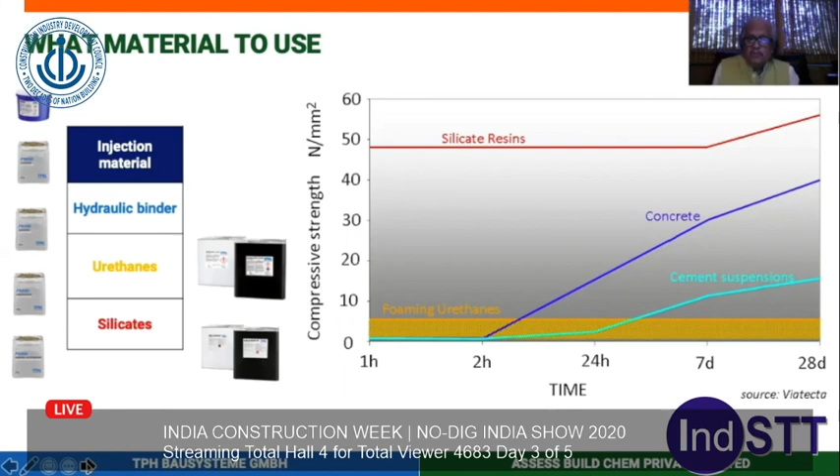It is very important to select the type of material. This is where it gets settled. Now please remember one thing, this is pure common sense. When something is settled, it settles because the bearing capacity of the soil is not adequate enough to take the surface loads. Now, this is very important.

So when you are trying to lift up the slab, lifting alone is not important, not enough. You have to first consolidate. Once again, this is an engineering property. After consolidating, then you lift it and lift it properly. Then the problem will be solved.

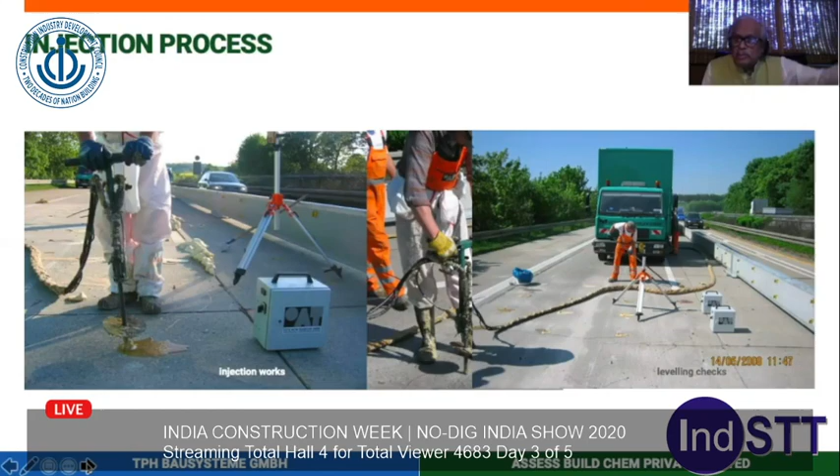This happened to us in one of the quotations which we gave for a big project. They said another person was doing the lifting of slabs at only 20% of the cost. Well, lifting the slabs is not a big problem. The moment a lorry or a plane lands on it, since the underground soil is not consolidated, once again it will go down.

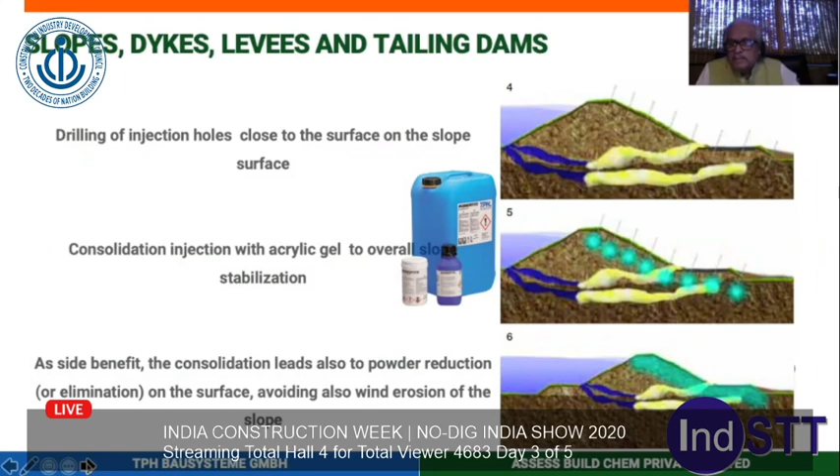Lastly, it can be used very effectively in dam structures and embankments. If there are streams going from upstream to downstream or the other way around, this water can be stopped by geologically locating them, using georadars to know where the streams are. The surface can be stabilized by using acrylic gels wherever necessary.

And this is most important. I think you can simply go on the website and put in 'Hallandsås tunnel project,' and you will find the accident which took place around 1995 to 1997. The company manufacturing the material put about 14 tons of gel inside to stop the water from this underground tunnel.

Fortunately, there was no loss of human life. This gel was poisonous. This gel is an acrylamide gel. It is poisonous. So please be careful.

Everything that gels is not the end of the story. You can see here, farmers near the construction site started complaining about the cattle becoming paralyzed. They killed about 370 animals to stop them from giving adulterated milk, adulterated by the cows themselves ingesting this. Human lives were not affected, but 329 wells were poisoned.

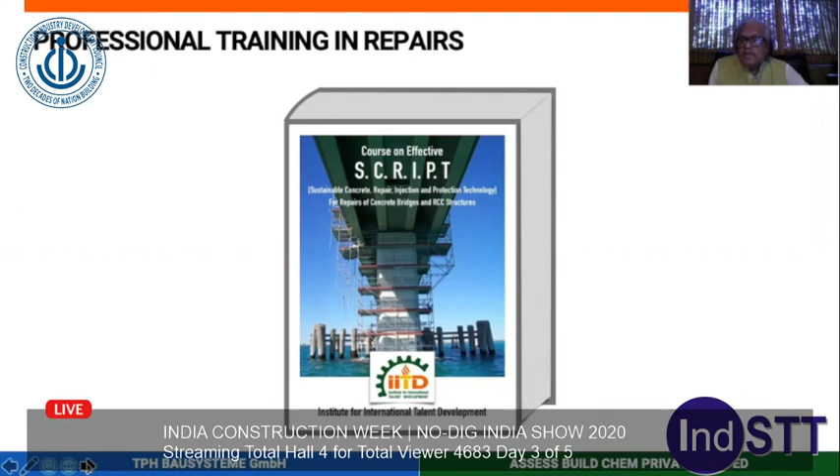So many civil engineers who are new can go for internships in these injections. They can become entrepreneurs. They don't have to rely on someone else, because they can buy one machine, get training, and use it. Ultimately, to repeat, this should be sustainable. Sustainability is the most important thing. Any technology that you bring to the country, please be careful that it is sustainable and it doesn't kill people.

Polyurethane injection is not polyurethane alone. Injection is a wide gamut of engineering field. It requires technical knowledge. Universities can start courses, professors can learn more about it, and they can have hands-on experience.

So I thank once again CIDC, who is making attempts to revive the economy, and this type of material will be needed because we are going for more and more underground constructions like metros and hydroelectric projects. Please note, by use of engineering knowledge and engineering materials, problems can be solved, and constructions, as well as completed constructions, can live peacefully for a much longer time. Sustainability and durability is the key. Thank you very much. Thanks.